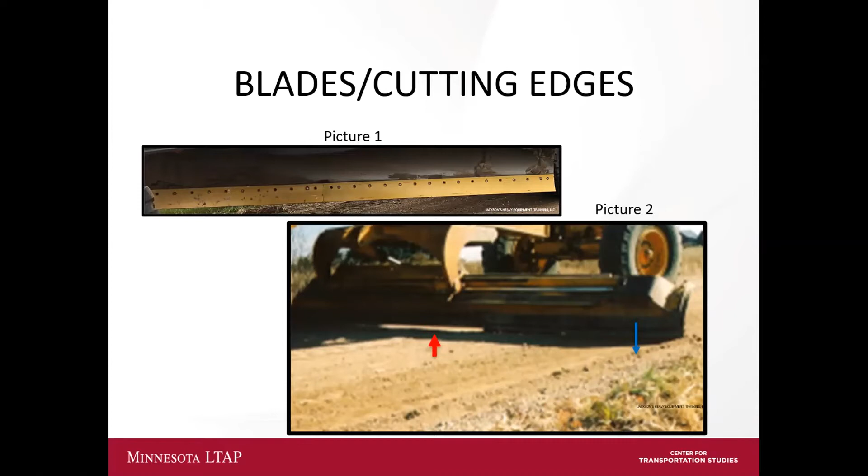Looking at picture 2, you can identify how a blade will cup quickly, deteriorate a road, and lead to road maintenance issues. When we look at picture 2, we can easily see the gap in the center of the blade, and we can see how the outside edges of the blades are cutting lips and taking the center crown out of our road.

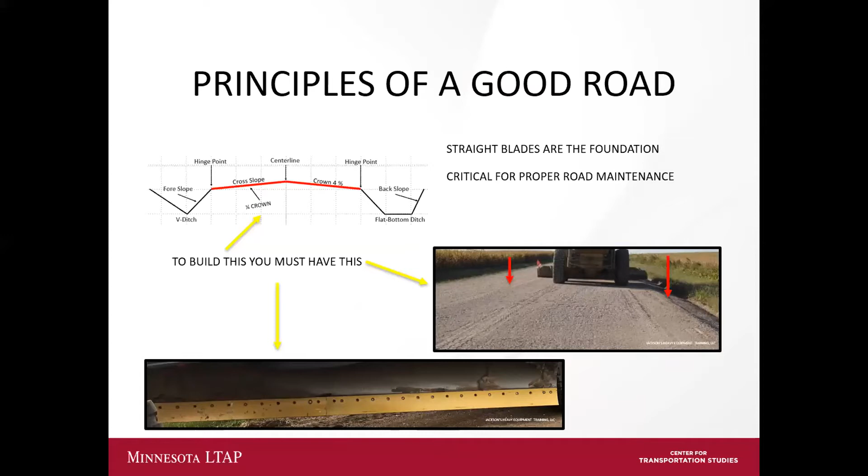I really need to stress the importance of having straight cutting edges on your blades. I've done a lot of training and I've been a lot of places. And one of the biggest things that I notice when we go out there to do training or to do anything is the cupped blades on a machine. And when you can really relay that to your operators and show them what that does to your road, it really provides a clear picture to them of the importance of straight cutting edges.

This will lead us into our first poll question. According to the U.S. Department of Labor, which occupation will grow faster than all others at a rate of 10 to 12% over the next 10 years? And what is the suggested cross slope of an aggregate road?

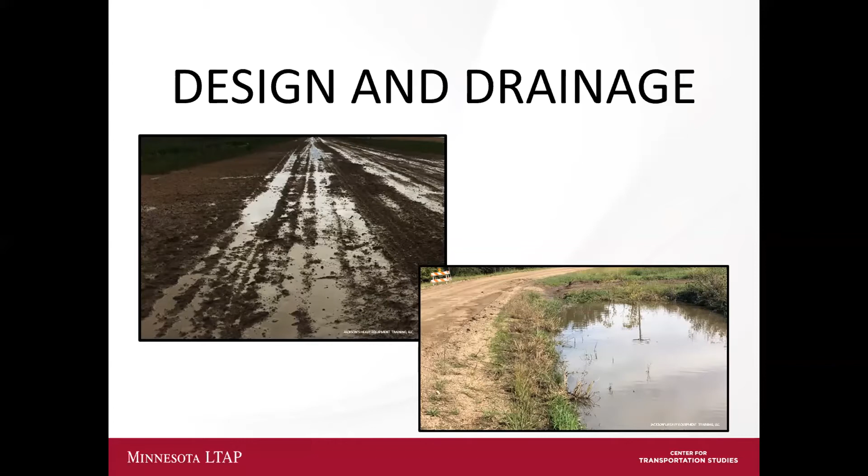Eliminate as much of the surface and subsurface moisture as possible. Too much moisture is and has killed many a gravel road. It is the cause of frost heaves, soft road beds, and frost boils. Drainage is the most important factor to consider in road construction and maintenance.

Something else I'd like you to consider in design is we need to focus on treating our roads like there are 2 halves to our roads. Maintaining our roads as 2 halves will assist in proper profiling. Maintaining unpaved roads with this concept challenges your operators to establish the proper profile through machine settings and technique.

Now let's take a look at cross slope of the road surface and identify the 2 halves. Cross slope runs from the center line of the road to the hinge point. The hinge point can be located in different positions depending on which design you use. The hinge point is where the road meets the shoulder or foreslope. So what is the recommended or suggested cross slope, and how much should we carry on our unpaved roads? Do we want to carry 2%, 4%, or 6%?

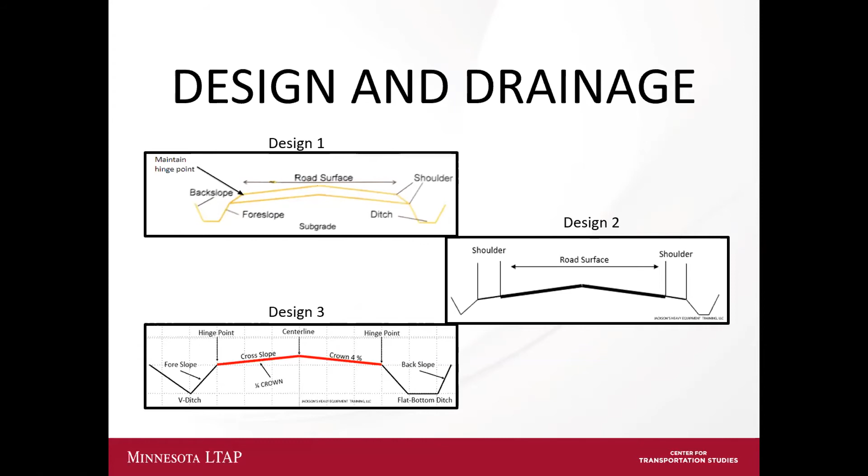Let's assume yes. Okay. You have one more. Oh, he says yes. There is one more related to the designs of the roads. Okay. If you are using design 3, how do you recover aggregate? Actually, it's a lot easier to recover aggregate in design 3, and it really plays an essential part of your road, being able to get the aggregate back.

That's a really good question, and if you don't mind, can I answer that one just a little bit later in my presentation? Because I do have a couple slides in there that talk about how to reclaim that material and bring it back up onto the road using design 3. No, that sounds good.

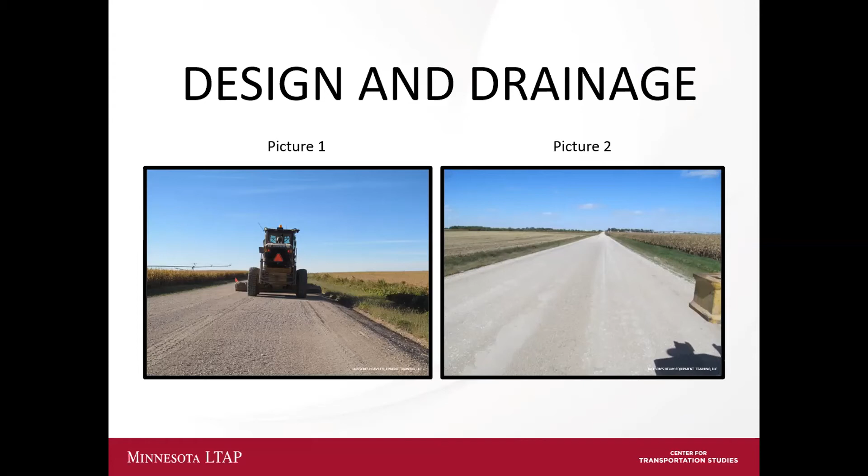So if you go back to when we started the presentation, when we were talking about cutting edges, and that picture of the machine with the cupped blades, when we send our operators out with cupped blades to try to make a uniform profile, we're actually helping them cut that lip on the edge of our road.

Excuse me. These pictures address the importance of proper profiling of the road and how crucial it is in drainage, road maintenance, and construction. We need to get the water out of the center of the road and to the ditches. A ditch doesn't provide much benefit to a road that is not properly profiled and retains the water on the road surface. A road can quickly deteriorate if it is not properly profiled.

The common question is, how do we fix soft spots, shoulders, frost boils, washboards, potholes, etc.? It comes down to the basics: drainage, drainage, drainage, and properly building, maintaining, and performing preventive maintenance to our roads. And this is accomplished through taking time to train our operators to develop skills and techniques to utilize in the road maintenance practices.

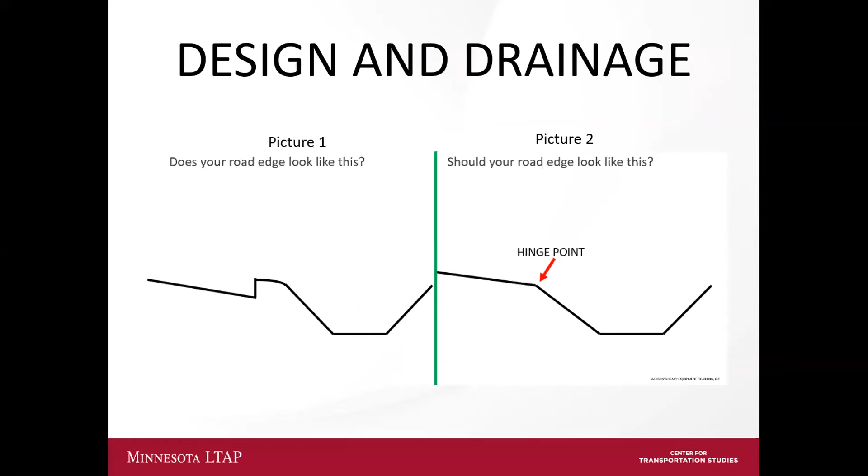This kind of takes us into our next poll question. 80% of equipment operators and 92% of highway maintenance workers have obtained this level of education. And the current deteriorating infrastructure costs the economy annually how much?

You may be thinking, why do I need to know the education level of my operators or how much the deteriorating infrastructure costs annually? These are important facts to know, because this provides information on how to effectively employ tactics to train our operators, and makes us take a hard look at how we maintain and perform maintenance and preventive maintenance techniques, and if the techniques we are currently using are working.

So if we're not getting the desired effect, where we have that nice profile to our roads with the nice shoulders, it's really important that we properly profile our roads. While you're doing the poll here, we'll go back to this one to answer the question from earlier: in design 3, how do we reclaim material from our ditches?